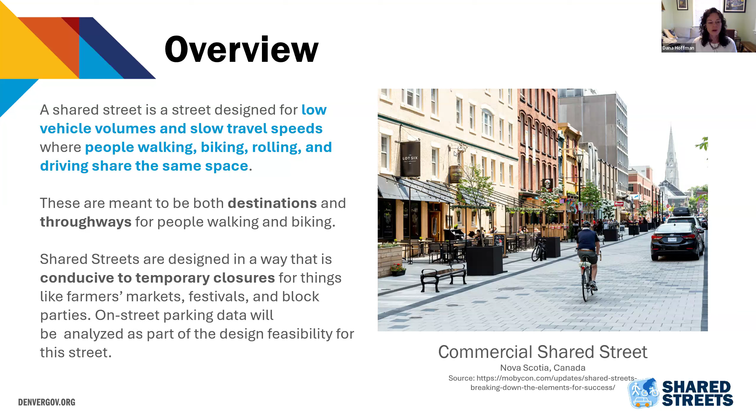These are meant to be throughways, and certainly they remain part of our street network, but they also become more destination-like, more gathering space-like. In many cases we want these to be conducive to temporary closures to cars, completely closing off the street for short periods for things like farmers markets and festivals.

You can take a look. These are all examples from other places that have really wonderful examples of how shared streets can be developed. So, key aspects of these shared streets.

They're designed to prioritize pedestrians, the most vulnerable users first, which requires really slow movement of all modes. They are not closed to vehicle access. There are other programs we've developed that allow you to close off portions of streets temporarily or permanently, but this is really a shared space.

A key aspect of these shared streets is that they have more amenities. They are amenity-rich spaces so they can be used for gathering. This generally means more trees, and in some cases green infrastructure that helps with stormwater, shade, seating, maybe public art or decorations, depending on the surrounding land uses. It'll be a slightly different mix of things, which we'll get into.

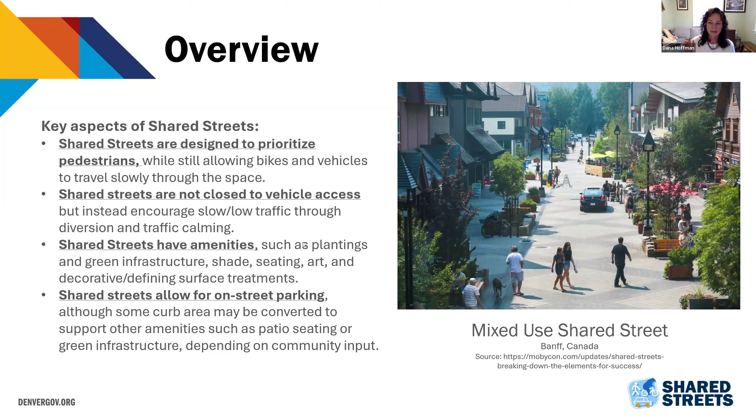We will probably be allowing shared streets to have on-street parking. That's part of them being a destination, but there's always a balance between the amount of amenities we can fit and the amount of on-street parking provided. So thinking creatively about curb use, like temporary loading facilities, will be really critical to success on these streets.

This image comes from our guidelines. This is a commercial shared street, so it's useful to divide shared street design into two categories: those in a more commercial land use context and those in a more residential land use context.

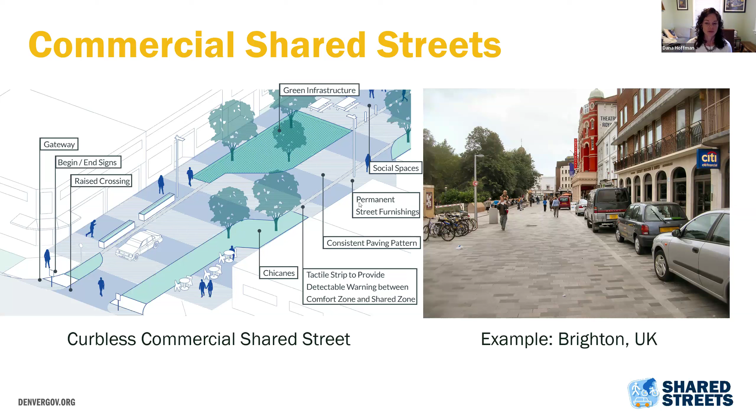In a commercial context, there are some similar features across both, but we would have more social spaces most likely, which help surrounding businesses and dining establishments be successful. These are some examples of the types of facilities and amenities you might see on a commercial street, more focused on providing seating spaces and gathering spaces. You might also have more of that gateway feel, an announcement or placemaking type feel in a commercial shared street.

39th Avenue Greenway is a sort of mixed shared street, more residential in nature, so it's a good example of what a residential space might look like. You might have fewer tables with seating for dining and instead focus more on green infrastructure improvements to create that park-like setting.

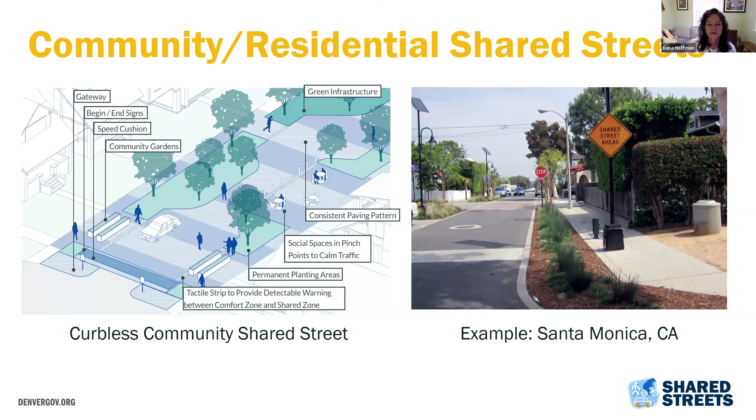This one is a different version of a commercial shared street -- a community shared street. Again, these are other examples where you're really focusing on trees and green infrastructure as opposed to more of that dining element.

We also identified 3 categories, and I'll run through these quickly since I know you have a full schedule, but having these different levels lets us implement accordingly. So, curb and gutter quick build uses more quick-win type facilities, things you might have seen on some of our bike facilities, things you can screw into the ground and do quickly.

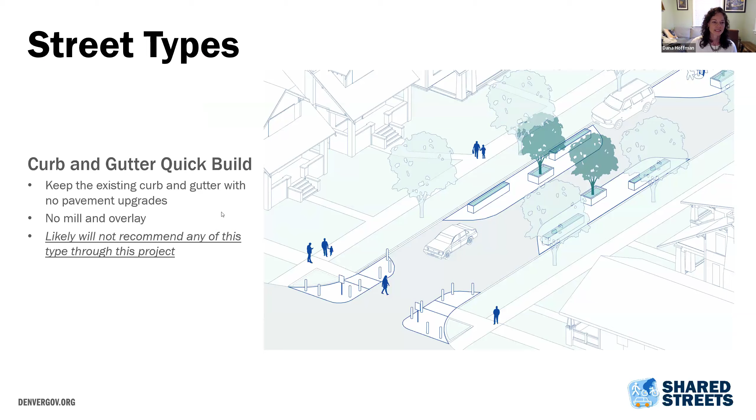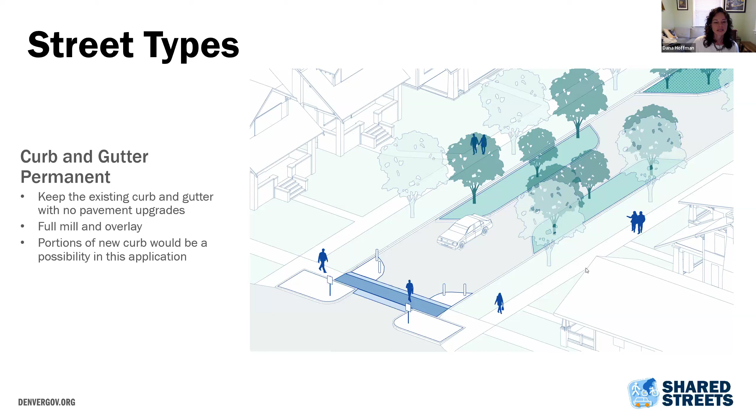Another version is called curb and gutter permanent, where we start to introduce more concrete amenities, maybe removing pavement at certain areas but maintaining that existing curb line and drainage structure. And then there's the bells and whistles version.

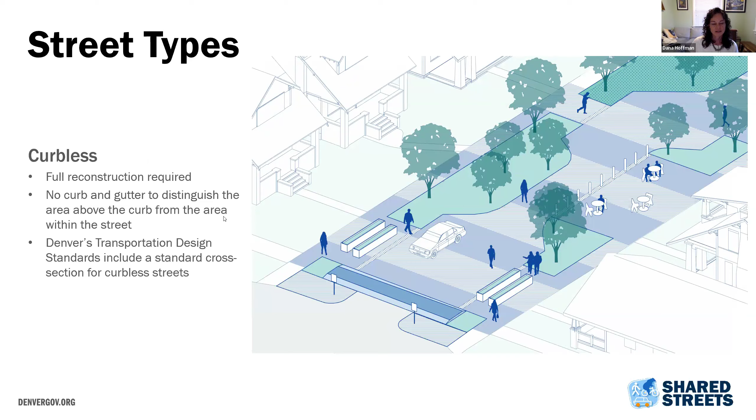39th Avenue Greenway is probably our only real example of this in the city of Denver. But this means you might fully eliminate that curb separation between modes.

Some of this will be more trail, but a section will be fully shared street that's in design. And North Acoma Street also in design. Wynkoop Street, sort of in front of Union Station, is going through a feasibility analysis.

So all this started through some locational analysis that we did. This is really a desktop analysis to meet our design guidelines, make sure these are safe spaces, make sure they're successful places, and we narrowed down from there.

I know I'm moving through this fast. I'm happy to move back through these slides.

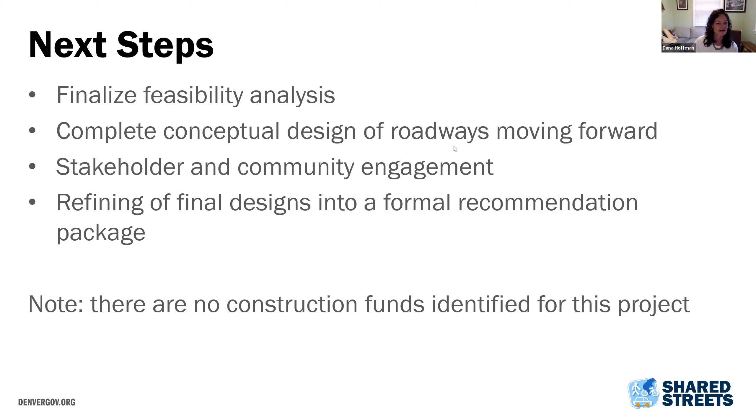I raced through that. I hope that was helpful, and I'm happy to jump back and answer any questions you guys have.

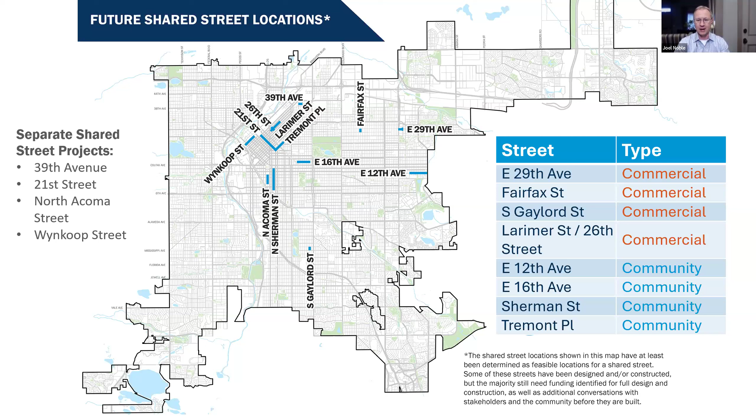Appreciate that. Okay, we have reached the end of our time here. Thank you so much, Dana, for staying with us here till 6:30. And if you have your contact information, I know somebody put in the URL for the project, but if you have your contact information, that would be great. Glad to see some specific ideas moving. I was actually wondering, I'm seeing some change in the past month or so on Tremont Place, so I imagine that what they're doing now is coordinated with the overall vision, even though it's not funded by this vision. So change is happening.

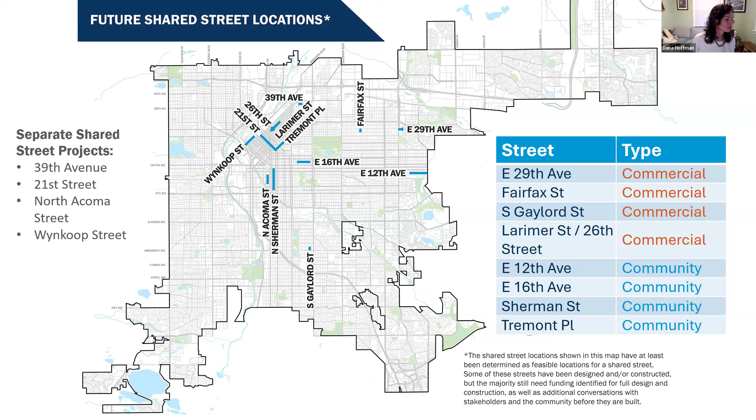Dan, not everyone here might have the full background, so I'm sure you'll talk about the purpose and then really focus on the design so that people can be prepared for any public comment they want to give in the comment period that's still open.

Absolutely, yeah. Looks great. See, I'm not super familiar with Zoom. Can you all see my presentation in presentation mode? It looks perfect. Okay, awesome.

Well, good evening to all of you. My name is Dan Fischer. I'm a professional engineer at CDOT, and I am managing the I-25 Speer and 23rd project. So it's really good to be here with all of you tonight to give you an update on the project. I definitely want to thank Joel for the invitation. I do have a fair amount of material to get through, so I would ask that we try to save questions for the end so that I can get through everything. I'll definitely do my best to save at least 5 to 10 minutes at the end for Q&A. Otherwise, I'll just set the scene a little bit more for all of you before I dive into this too much, and give you a high-level overview of where the project currently stands here at CDOT. We have identified our recommended proposed action, so like Joel mentioned, I'll certainly be giving you quite a bit more information about that.

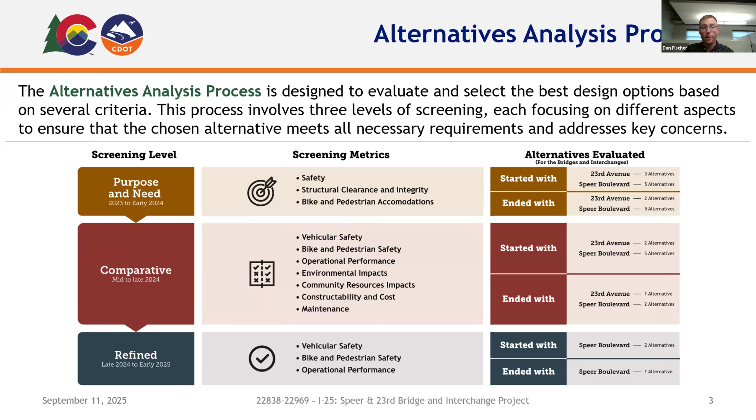We did have to take Speer to a more refined level. We took 2 alternatives for Speer to that next level of screening, and then ultimately made our decision about the recommended alternative for Speer at that point.

Next, I'll show you the exact results for each interchange at their respective final levels of screening. Again, if you want all the details about the entire screening process, check out our online public open house materials—I won't have time to go through every detail tonight. Let's start with the 23rd Avenue comparative screening results.

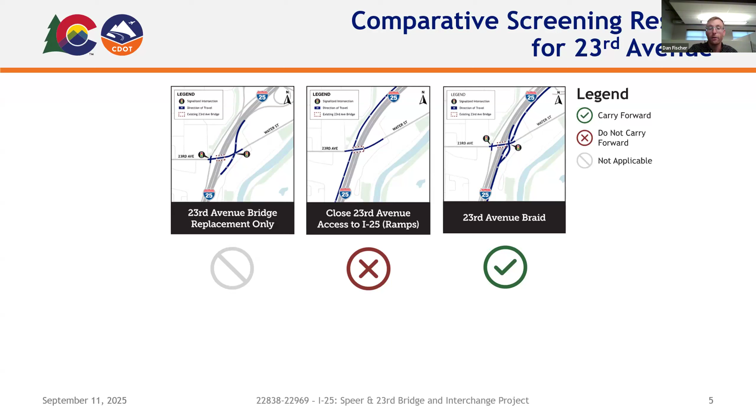CDOT was able to identify the recommended alternative for 23rd Avenue here in the comparative level of screening. The bridge replacement only alternative wasn't applicable here because it had been screened out earlier. So we were mainly comparing closed 23rd Avenue access to the 23rd Avenue braid option. We decided to carry forward the 23rd Avenue braid, but not the ramp closure option, and the next few slides will show what supported that decision and set it apart from the ramp closure alternative.

The 23rd Avenue braid is recommended as the proposed action to be evaluated during the NEPA process because it balances the needs of all local stakeholders. Specifically, it achieves this balance because it improves safety on I-25 by increasing the distance to merge.

Out there today, the 23rd Avenue on-ramp and the Speer Boulevard off-ramp to eastbound Speer are really close together, and they are in dangerous conflict with one another because the merge distance between them is very short and extremely substandard. The nice thing about the braid is that it will make those ramps completely independent from one another, so that vehicles merging onto I-25 from 23rd do not have to be in conflict with vehicles simultaneously trying to exit to Speer. That will make for a significant safety improvement on I-25.

Next up, the braid enhances safety for everyone using 23rd Avenue, whether they are walking, biking, or driving. This is the case primarily because of the much improved geometry on the east side of the bridge. There will no longer be those free-flowing ramps that come into 23rd Avenue at odd angles. Instead, there will be a controlled intersection there, with a new signal. That's one of the really big reasons this alternative enhances safety for everyone.

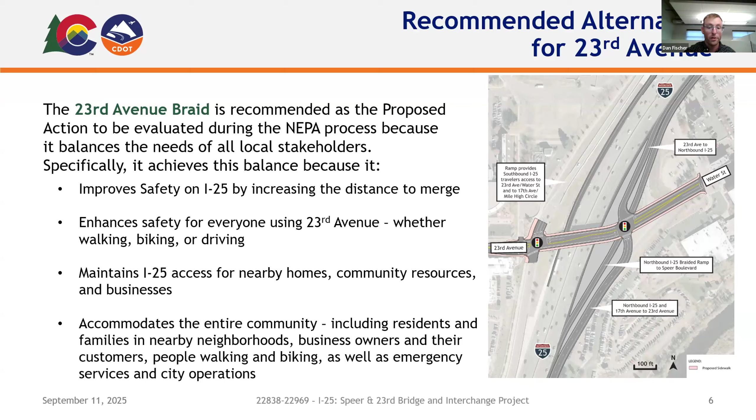Speaking of accommodating the whole community, I want to take more time to highlight the non-motorist aspect of this—for pedestrians, bikes, and micromobility device users, and how safety will be improved for them as a result of this 23rd Avenue braid configuration.

Again, the geometry I mentioned and the overall configuration of the bridge itself are the biggest contributing factors to these substantial safety improvements. Those free-flow ramps that no one enjoys out there will go away, and once again we'll have a signal at the east side, so it'll be much more controlled. One of the changes we haven't talked about yet is the addition of dedicated left turn lanes.

I'm sure a lot of you are familiar with the existing condition out there and how left turning vehicles basically have to obstruct through traffic behind them. What often happens is they get impatient, they feel the pressure of vehicles behind them, and so they misjudge gaps in traffic or take an unnecessary risk to make that left turn. They may not even be looking for bikes and pedestrians in the first place because they're feeling that pressure and getting impatient. But it's also often the case that even if they see a bike or pedestrian, they may misjudge, for example, the speed at which a bike might be coming down the hill in the eastbound direction on 23rd Avenue.

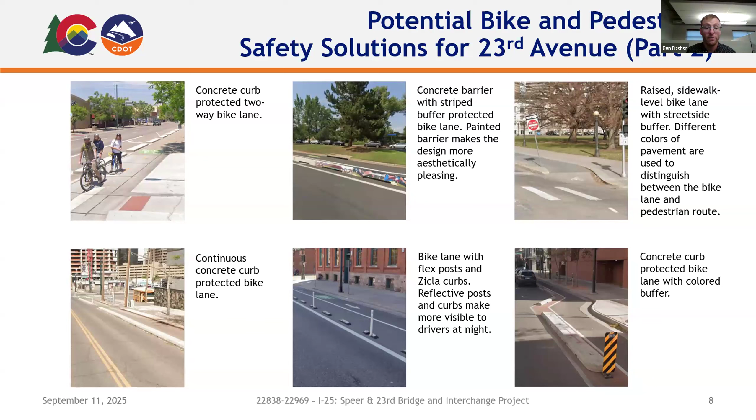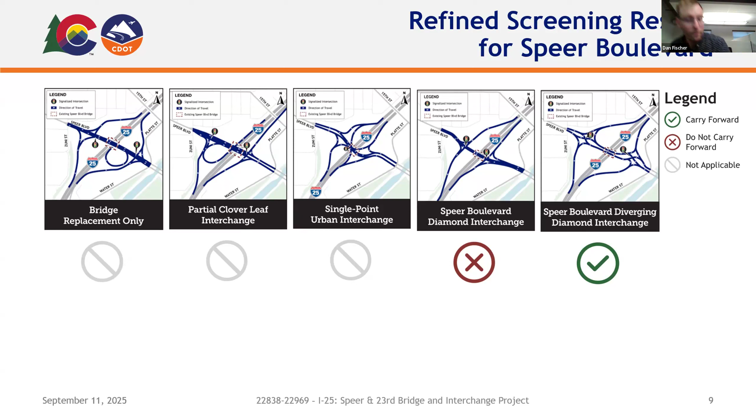When compared to the traditional diamond interchange, diverging diamond interchanges generally experience 15% fewer crashes and 45% fewer crashes resulting in a fatality or serious injury. They also remove left turn conflicts, which improves safety for pedestrians, cyclists, and drivers alike. Diverging diamond interchanges also provide short and convenient crossings, as well as a wide barrier protected center path for cyclists and pedestrians.

Consideration of these three characteristics of a diverging diamond interchange, which by the way we also sometimes refer to as a DDI - so if you hear me say that, that's what it means - those three characteristics were pivotal in CDOT's decision to choose the DDI as the recommended alternative here at Speer Boulevard. It is a really good option for the overall safety of all users.

You'll see on my next slide here an example of that barrier protected center path that I mentioned. That's really great at limiting the exposure of bikes and pedestrians.

I do also want to be sure to mention that we have heard some concern from the public about there potentially being uncontrolled pedestrian crossings at the ramp terminals. So this is an example of a location that people are concerned about, and those are areas that we are very focused on here at CDOT right now to make sure we make as safe as possible in the final configuration.

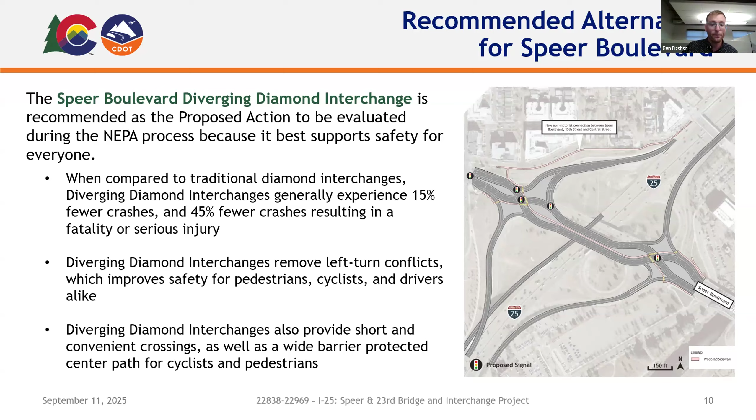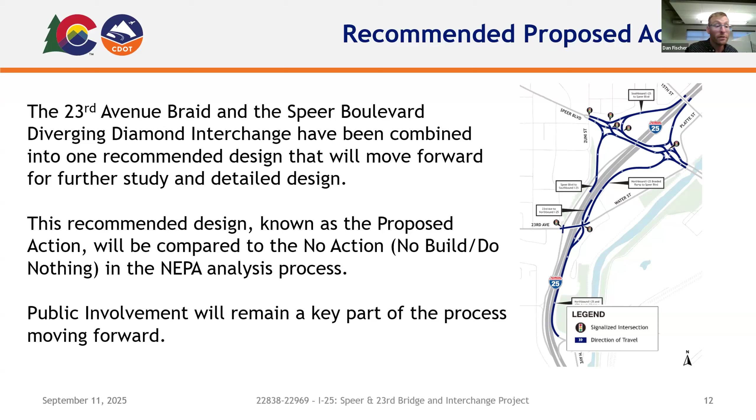This is what we're moving forward with in our preliminary design currently, and also in our NEPA analysis process. A key part of the NEPA process is comparing the recommended design to the no action alternative. That review and documentation process will help us disclose all of the impacts and figure out potential mitigation, and it'll help identify the necessary permits that could result from the proposed action. Public involvement is certainly a key aspect of the NEPA process, and that's why it continues to be an ongoing effort for us.

For the rest of this year and into about mid next year, we will be doing that NEPA analysis and documentation, as well as working on our preliminary design, which we are currently working to take to a 30% level.

To be totally honest with you, beyond that mid-2026 timeframe, there isn't a ton of real certainty about how the schedule is going to play out. We do pretty commonly get the question of when construction is going to start and how long it's going to take, but those aspects are really still dependent on quite a few moving parts, so unfortunately we do still have to be a little bit vague about that.

But to avoid giving you a complete non-answer, I'd say it's pretty reasonable to expect construction will start sometime within the next few years, and it's also likely to take a couple of years. That's all I can say about it right now. But other than that, I just want to make clear that as things become more clear for us here at CDOT, we'll definitely keep the public apprised of that information.

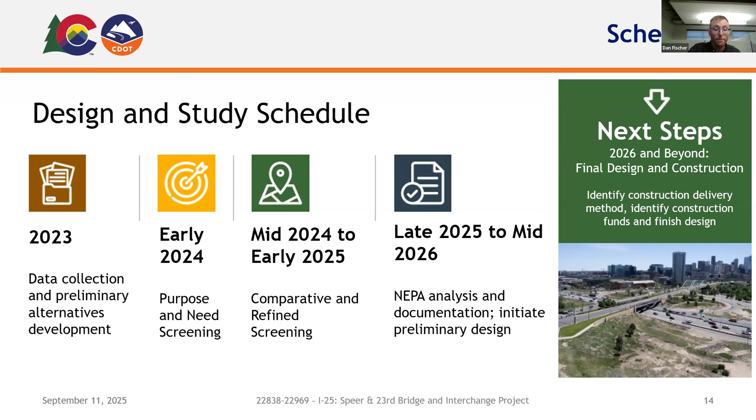Yeah, thank you. A clickable link would be great.

We've got about 5 minutes for questions. What I'm going to do is first take questions from the chat that are about the 23rd, and then we'll switch to the Speer. So the highest upvoted question here is from Alejandra on 23rd, about this alternative versus potential others. Alejandra?

What? I won? I wasn't expecting that. I forgot my question, but hi, Dan. Hey Alejandra, how are you?

So when I was talking to Jacob at the open house, he agreed that the safest alternative, the most people-friendly alternative, would have been closing the on and off ramps. It also would have been the most cost-efficient alternative, and it would have gotten us closer to the greenhouse gas emission reduction goals. I know there was a lot of pushback from special interests on that, but I wonder, as advocates, since we seem to have lost this fight at least right now, how can we do better next time? I'm at a loss for words.

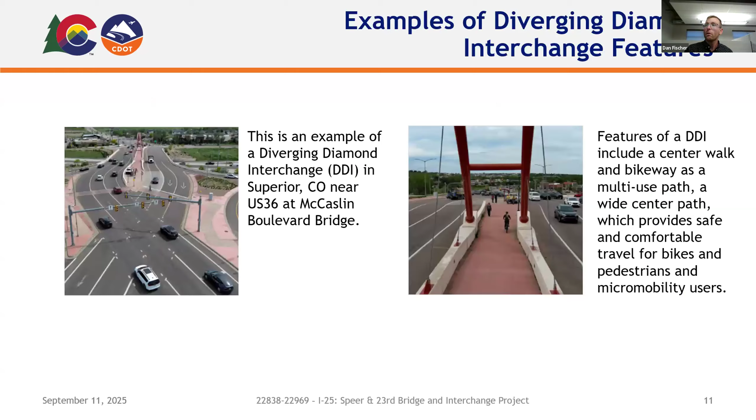I think we did evaluate roundabouts here at 23rd early on in the project, and what often becomes challenging with roundabouts is basically the 3D aspect of it, right? So we're raising the bridge here, and we're going to have to tie everything in and have a new profile across 23rd. There are always so many challenges when it comes to engineering and making everything tie together. So that was the biggest challenge when we first considered roundabouts anywhere here on 23rd.

Okay, there are intersections along, I think it's 70 in particular, that have a dog bone crossing over the highway over 70. So maybe that could be used as an example. As someone says in chat, I think that's something we could probably handle, right? It just seems like a good balance of solutions, so I'm surprised it wasn't considered.

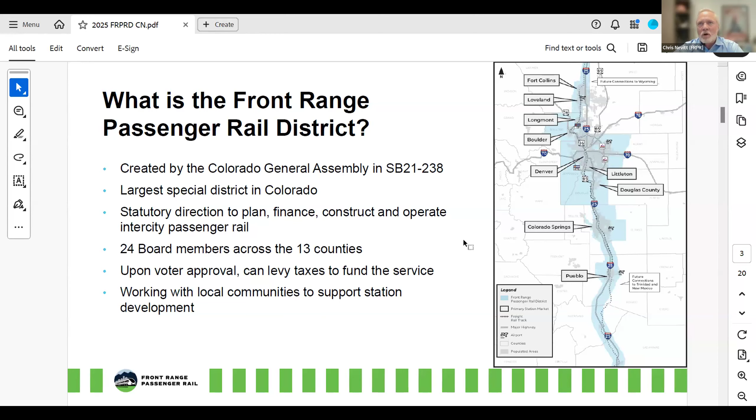So a little bit more about how the board is constructed, so you know the interests focused on this effort. The core of it is metropolitan planning organizations - if you don't know what an MPO is, you're probably familiar with DRCOG, the MPO for the Denver-Boulder metropolitan area. There are 4 representatives from DRCOG, representatives from the Pikes Peak COG (Colorado Springs), Northern Front Range (Fort Collins), Pueblo COG, and South Central (Trinidad) - so a lot of representatives from the Councils of Governments. There are 6 appointees from the governor covering special interests and expertise like transportation design or finance. Labor has a seat, CDOT of course is represented. And because we wanted everyone at the same table, we added key players who will have a big role in delivering Front Range Passenger Rail - the freight railroads, Amtrak as a potential provider, RTD, the I-70 corridor, and the states of New Mexico and Wyoming. So wall to wall.

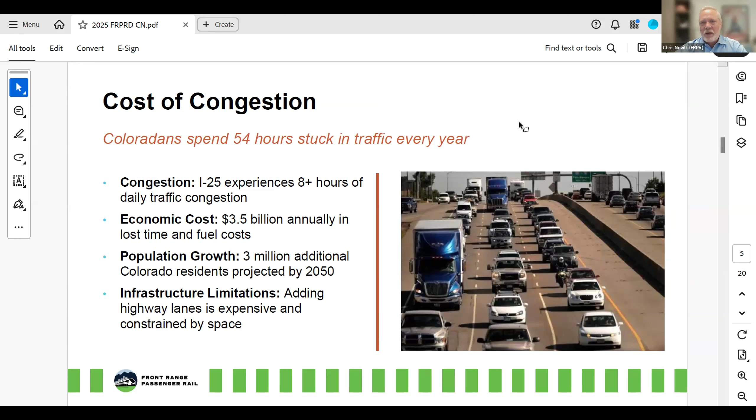And somebody else, just as clever but not as famous as Einstein, said dealing with congestion by adding lanes is like dealing with obesity by getting bigger pants. So this is a fool's errand. We don't want to keep repeating it. We want to provide a different option, which is Front Range passenger rail.

Right wingers will tell you that transit and rail are a communist conspiracy. But I think passenger rail is in service to the most fundamental of American values, and that is freedom—the freedom to make your own choices about how you want to move around your community, how you want to get from A to B, and having a passenger rail option to connect to the communities of the Front Range is the very definition of freedom.

Some people will want to make that choice. Others cannot drive and need to have that choice. If you think about it, currently your government is telling you what to do. If you want to travel to Pueblo, say, your government is saying there's only one way to do that—that's to drive, so that's what you have to do. We want to provide options, choices, freedom.

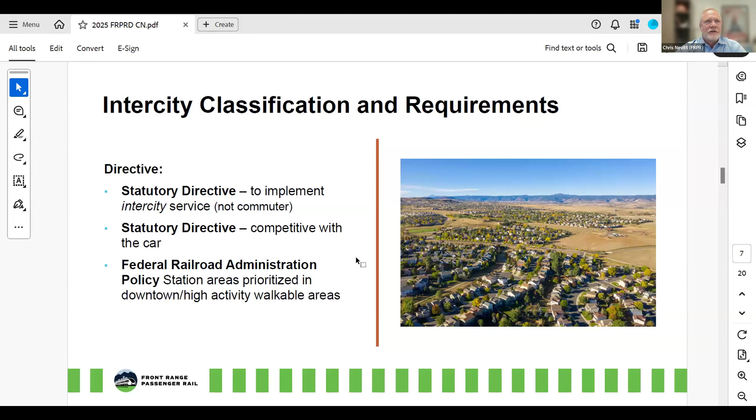Here's some more detail on the service we're proposing to deliver. One of the ambitions we hear from a lot of people is, oh, high-speed rail—we want something like a bullet train or the TGV in France. Our goal is to deliver rail service as fast as possible. We think you deserve it, not just your grandkids. One of the ways we can do that as fast and as cheaply as possible is to use existing freight rail corridors.

Rather than building all new corridors, we can use existing freight rail corridors, and that speeds the time to market and makes it a whole lot cheaper. So we'll be using the freight rail corridors, with a speed limit of 79 miles an hour—I'll get to a bit more on that in a second—dictated again by the fact that we're using freight rail corridors.

Nine principal stations: think of Denver in the middle, four stations to the north—Boulder, Longmont, Loveland, Fort Collins—four stations to the south—Littleton, Douglas County, Colorado Springs, and Pueblo—and then future service on to Wyoming and New Mexico, or Trinidad and New Mexico.

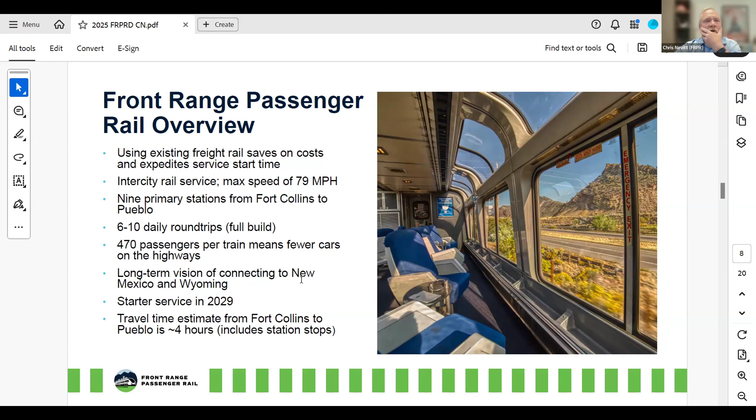Starter service in 2029 - I'll come to that in just a second. The whole ambition is to be competitive with driving a car, so less than 4 hours all the way from Fort Collins to Pueblo.

Right now we're at the end of our principal enterprise, the service development plan. It's a very long, complex, detailed document.

We're doing it in collaboration with CDOT, who is sort of the principal writer of it. The service development plan lays out all the details with respect to the route, the frequency of service, the cost, the fare structure, and all the infrastructure improvements that have to be made in order to make passenger rail possible, as well as a phasing program for how we get from where we are now with nothing to what we're aiming for, which is 10 round trips a day.

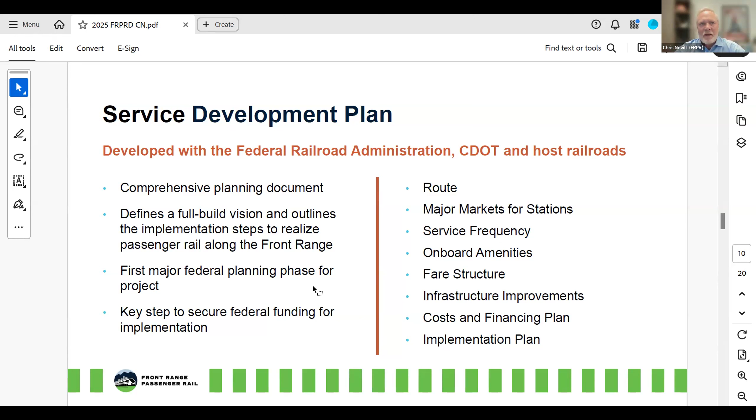The service development plan is also vital for securing federal funding. As everybody is probably aware, federal funding is currently not heavy on the ground, but we anticipate that will change in the future. And when it does, we want to be ready - that means having a service development plan ready to go.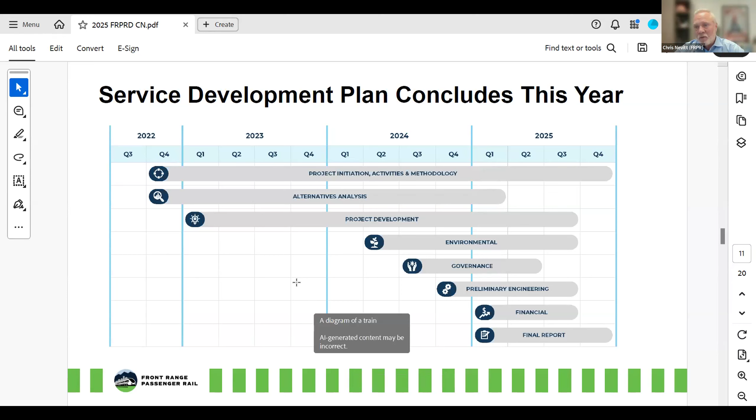So this is all the activities associated with the service development plan. As you can see from the Gantt chart, we've been working on it ever since we got started, and we anticipate getting the final report done by the end of this year. Then we'll have the service development plan in the can and be prepared to do environmental work and accept federal money.

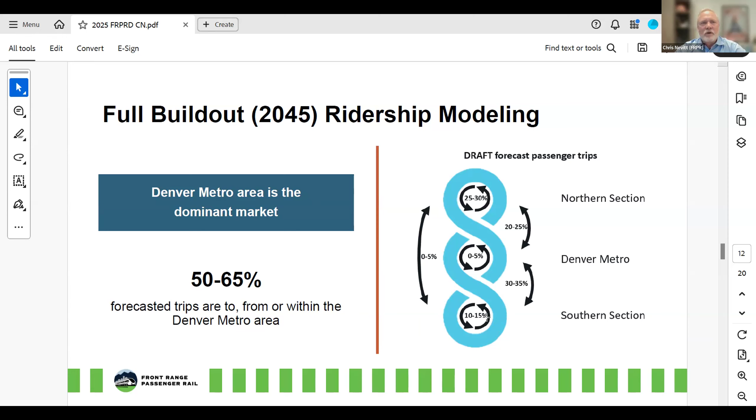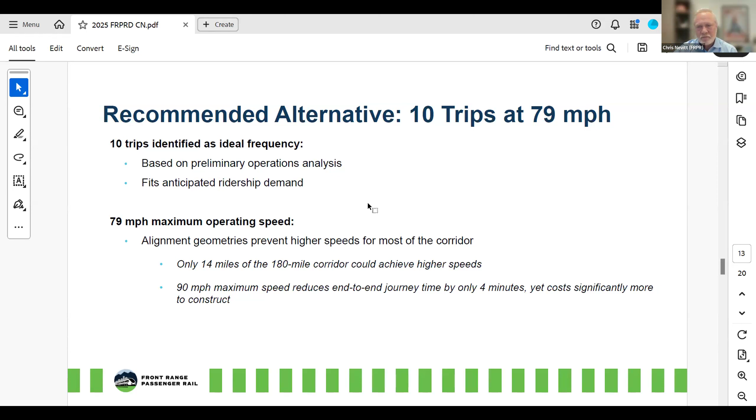So that's Front Range passenger rail, and we are aiming at ultimate build out of 10 round trips a day, all the way from Fort Collins to Pueblo and eventually to Trinidad. But again, we're not letting grass grow under our feet. We want to deliver this as soon as possible.

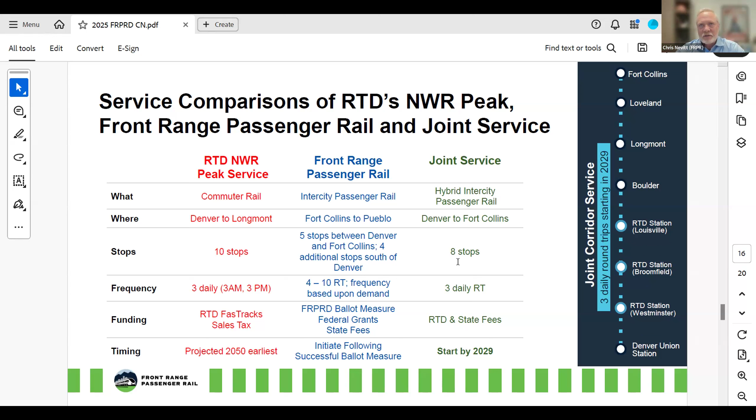We can have 3 round trips a day, but these are real round trips. In other words, you can get from Fort Collins to Denver and Denver to Fort Collins in the morning, same thing in the afternoon, same thing in the evening. It's not as Denver-centric as we talked about, and we can deliver that by 2029. So that's the plan as it exists today.

So next steps — we're going to complete the service development plan, so we can start doing environmental work on the whole corridor. We're going to continue doing public education and coalition building, building to a ballot. And in the meantime, we're doing joint service, and we've already begun negotiations with the Burlington Northern Santa Fe Railroad, who owns the freight rail tracks north of Denver, and doing the financial planning to make that happen.